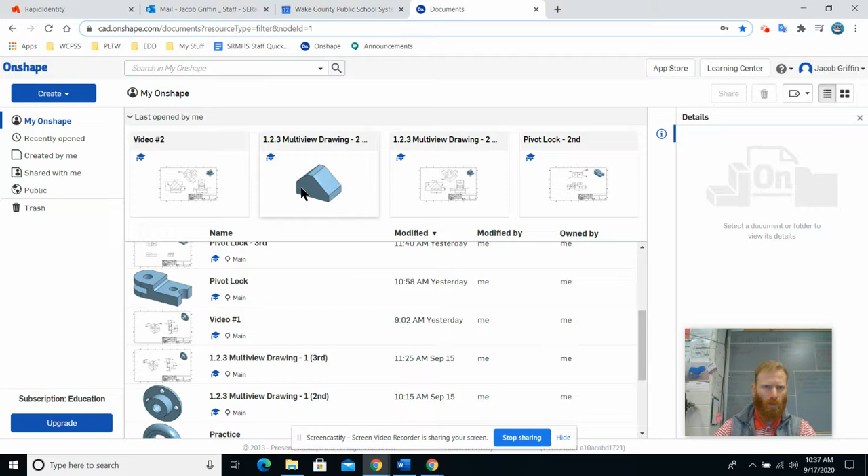Today we're going to be looking at the second part of our video 2, where we were building the rod holder. So hopefully you've logged into Onshape. You've got your part labeled down here, whatever you named it. Here's where we're building it in class, 1.2.3 multi-view drawing number 2. But for this video, I'm going to be building on video number 2. So clicking to open that up.

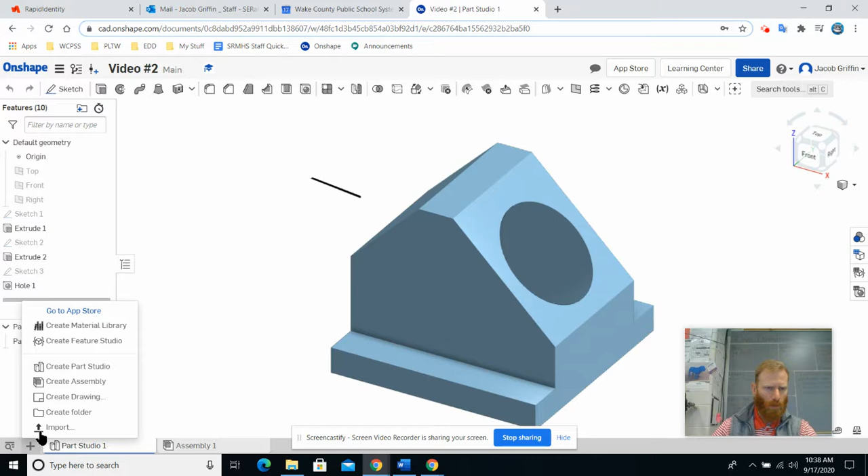So if you don't have your 3D model, please go back and watch the videos that I've already loaded on our website. That will help you get to this point. And what we're going to be doing today is creating the drawing file. Right, so down here next to Part Studio number 1, you have a plus sign, insert new element. Click on that, create drawing. Recently opened, if not, under Onshape, we're going to be using the ANSI B inch drawing file. No views. Okay.

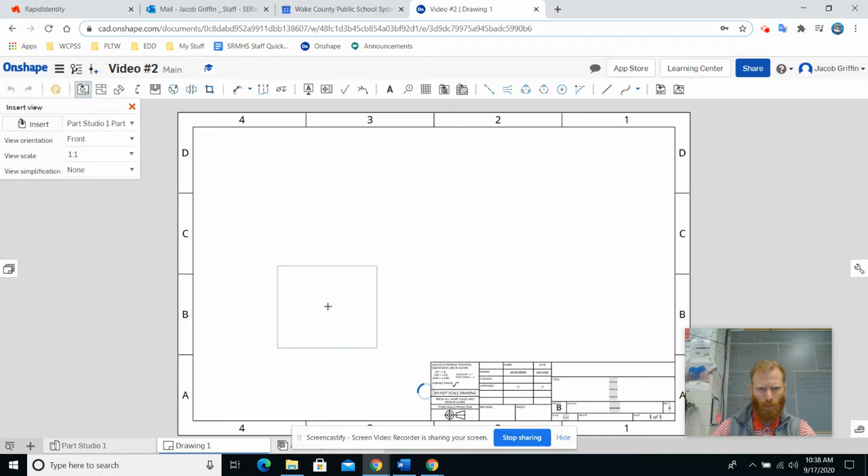All right. They bring up Part Studio 1, part number 1. Click on that to bring it over. And let's plant our 3 views. So front. Right side. Clicking back on the front view to bring up a top view. And then clicking back on the front view, coming out at a 45-degree angle, gives us our isometric view.

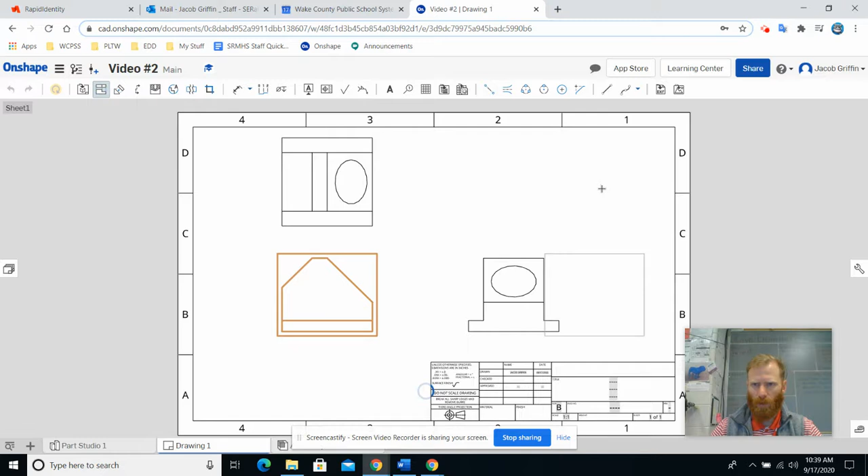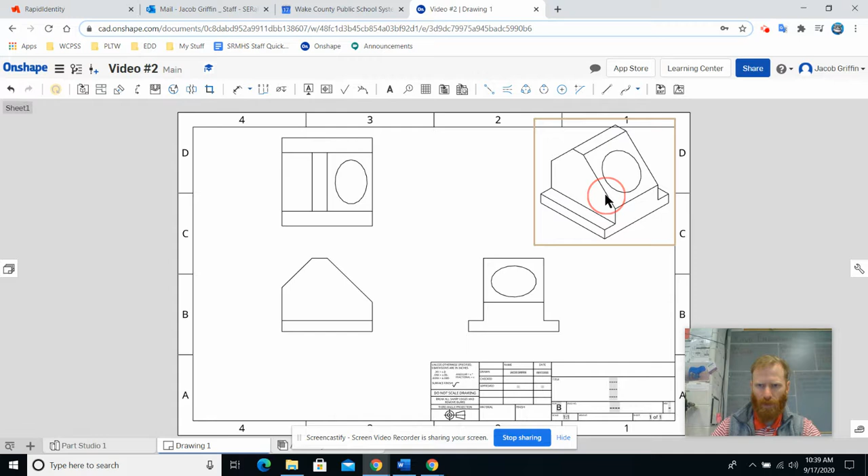Let's throw this guy over here in the corner. All right, trying to snap down there, so we'll just plant them here. Escape out of our projection views, and let's double click on this guy, and let's change his scale to 1 to 2. All right, there's no reason for him to be that big. Escape out of that. Oh, I didn't save it. 1 to 2, green check. And then we can slide them up a little bit closer to the corner. We can right click on them and show shaded view.

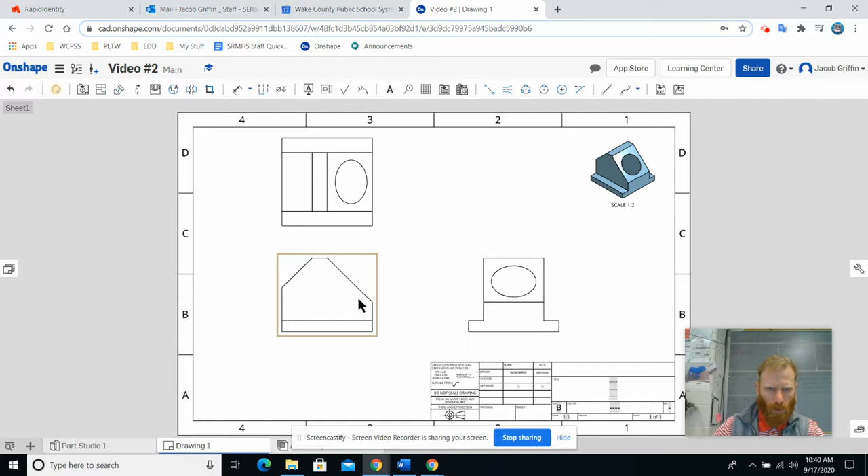All right, so now we can focus on our multi-views. One thing we can go ahead and do is we want to show those hidden lines. Right click on the front view, show hidden lines. And this right clicking menu bar gives you a lot of options of what you can do. So it's really important to always consider looking into that. All right, right click on all these, show hidden lines.

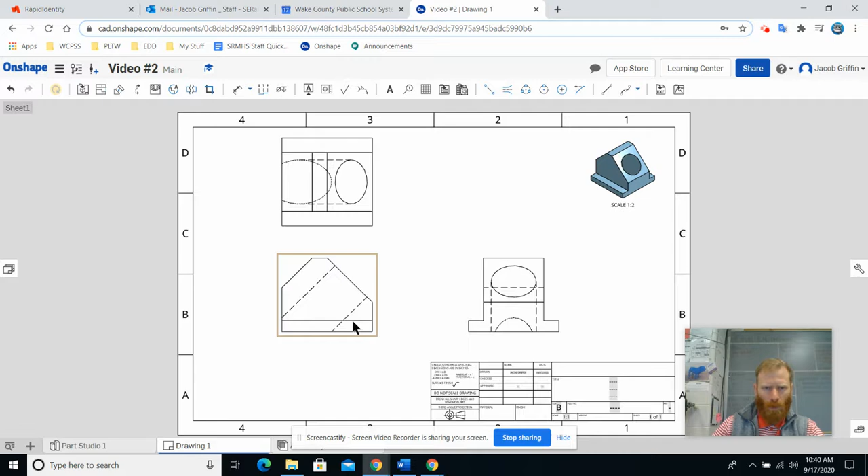So let's start dimensioning this guy. Come up here to our dimension tool, or we can hit D on our keyboard. Let's lay out our major dimensions first, so our overall height. Giving us plenty of room inside of there. Our overall width. Plenty of room inside of there. Our overall depth. This one's getting really close to the title box, so let's escape out of dimension tool and slide that guy out. All right. Now I can have it in line with those on there.

All right. We can go back to our dimension tool by hitting D. We can show the depth of the part on top of the flange, and then the depth of one of these flanges. All right, and then we can do math to figure out the other side. Okay, so we know the height. Well, we know the height of our flange first off. Show that.

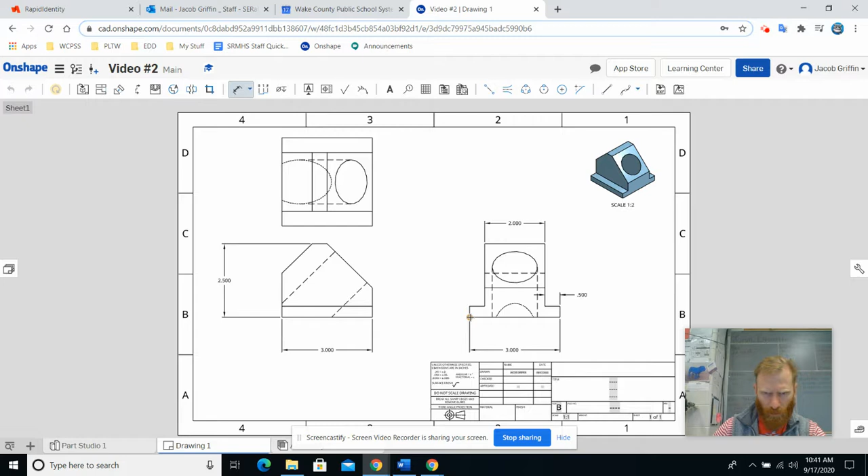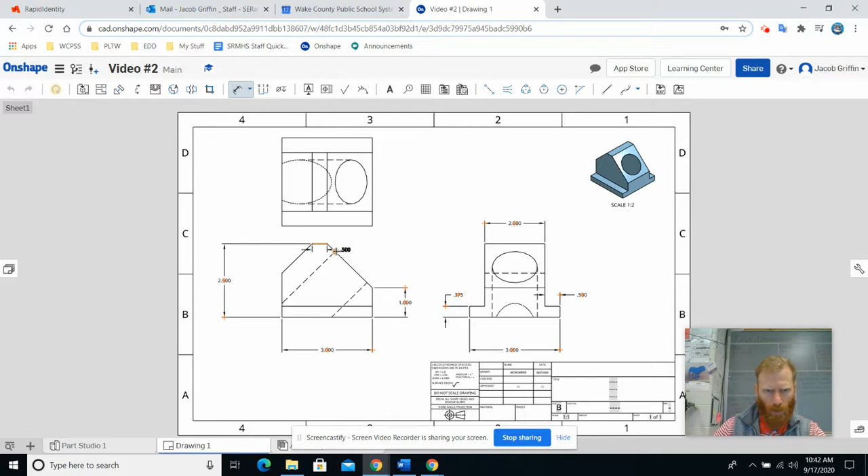All right, and then we know the height from the bottom to our angled side to be 1 inch. Remember, we don't know the length of this face, but we do know the angle it creates at the top. So we can click on the top and then click on that face, and that gives us our 45-degree angle.

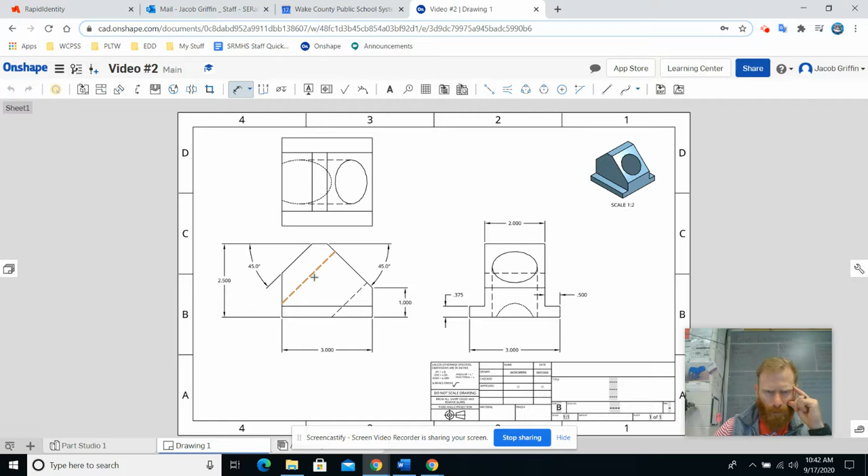And we can do the same over here on this side. Oh, must have clicked on the wrong thing. Face in that side, 45-degree angle. All right, so we'd still need to know, remember looking back at our drawing, it gave us this run right here of this downward angle. We could give that again, or we could just pull this out.

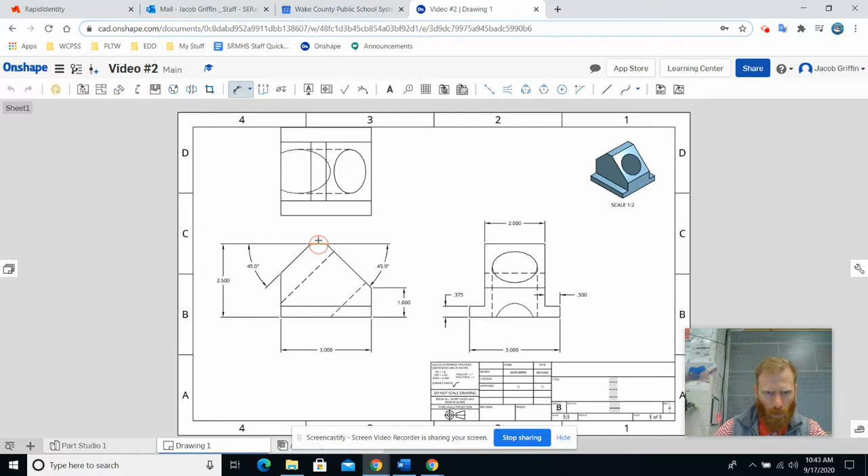Let's get out of this. Let's move this top view on up there. So back to dimensioning tool, pull this out. Slide it out here to the side. It's a little tight inside of the extension lines.

Okay, so we need to add some things to show that this is a hole, because right now, looking at just these hidden lines, it could be a square, rectangle, or anything cutting through there. A hole will have a center line. So right here is our edge-to-edge center line. So we can click on that hidden line, click on that hidden line, gives us a center line. So that's perfect. So now it looks as though we have everything dimensioned except for our hole.

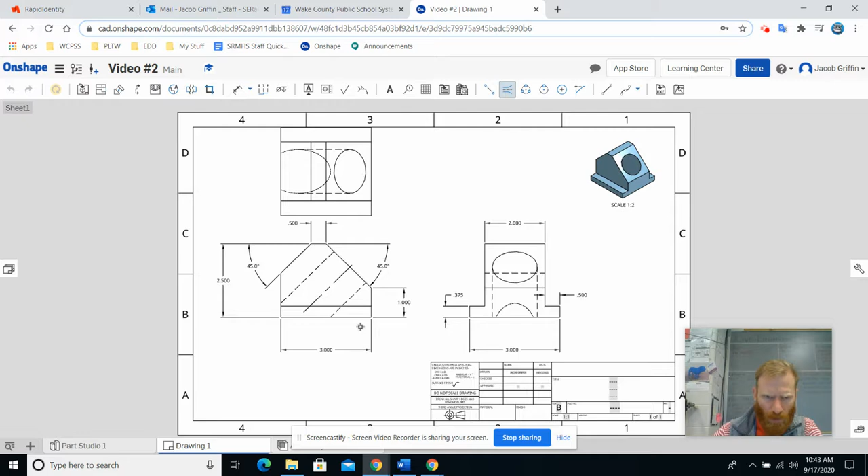Let's go back into our dimensioning tool. Won't let us dimension our hole in here. Won't let us dimension our hole here. We could dimension our hole here, but one of those rules of dimensioning is we never dimension two hidden lines. So we want to look straight down on that hole. And how do we do that? Well, we use an auxiliary view.

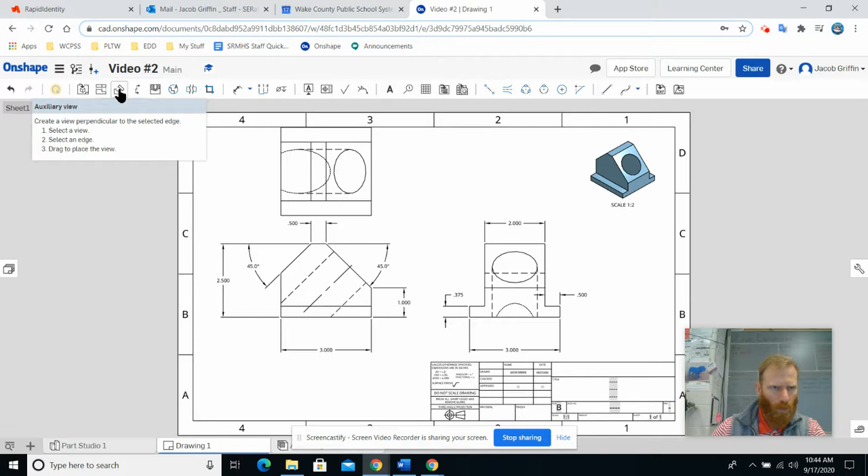This button up here looks like a square with an arrow looking down on a triangular face. If you hover over it, it gives you the steps: select a view, select an edge, and then drag to place the view. So we can do this view. We're going to select this edge. We're going to drag it out here at a 45-degree angle. And look at that. That's our view. That's what we need.

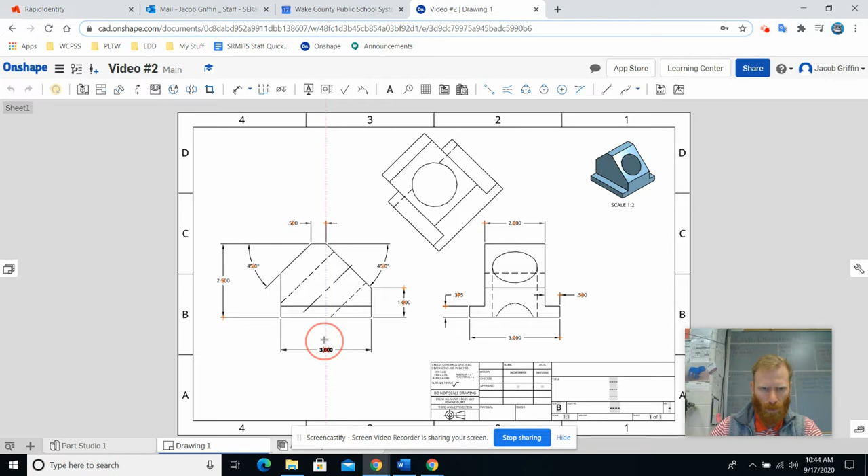All right, so right now our drawing is getting very tight, and we haven't done anything with this top view, so let's get it out of the way. Let's just delete it. We're going to label the hole on our auxiliary view, and that will give us plenty of room and information. All right, so I'm just kind of sliding these drawings down, giving us a little bit more room.

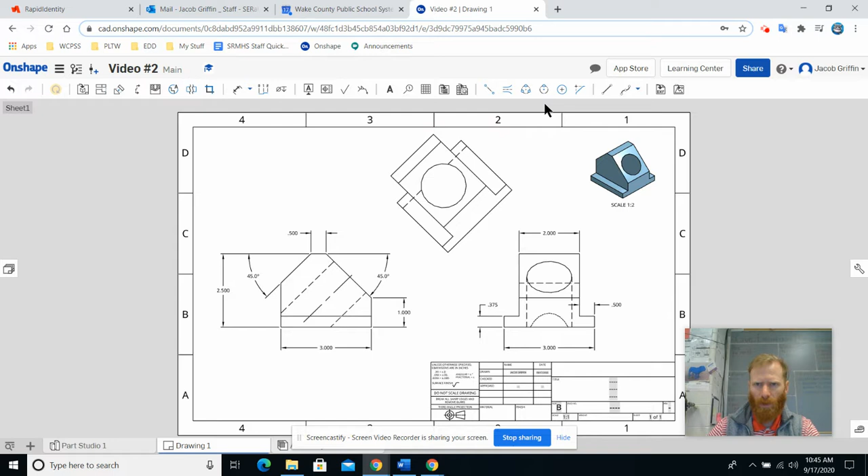All right, so we're looking right down on this auxiliary view. This is something like a detail, a breakout on traditional drawings. Instead of having it all on one page, this would be on a details page. But for us, we're going to leave it on here. So let's add right here a little circle with a plus sign inside of it. That's a center mark. Let's add a center mark to this. And now we can dimension to that center mark.

So we knew how much it was from the side. All right, pull that out up here. 1 inch from the side. And it was also 1 inch from that bottom face. So pull that out here. All right, just trying to keep it uniform and neat. And then we can show this dimension right here, the diameter of our circle.

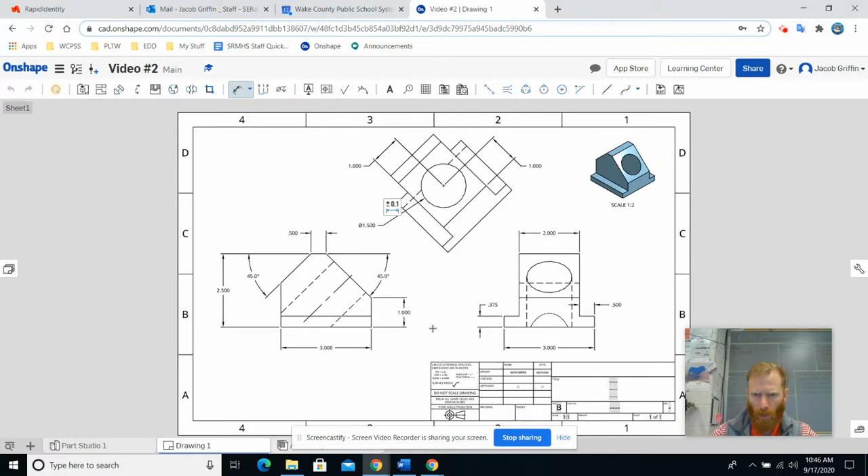All right, so now everything is labeled. We have all the drawings we need. We're able to label that through hole on that angled face by doing an auxiliary view. So this would be what you submit for homework, taking a snapshot of this or using your snipping tool to paste this into your homework.